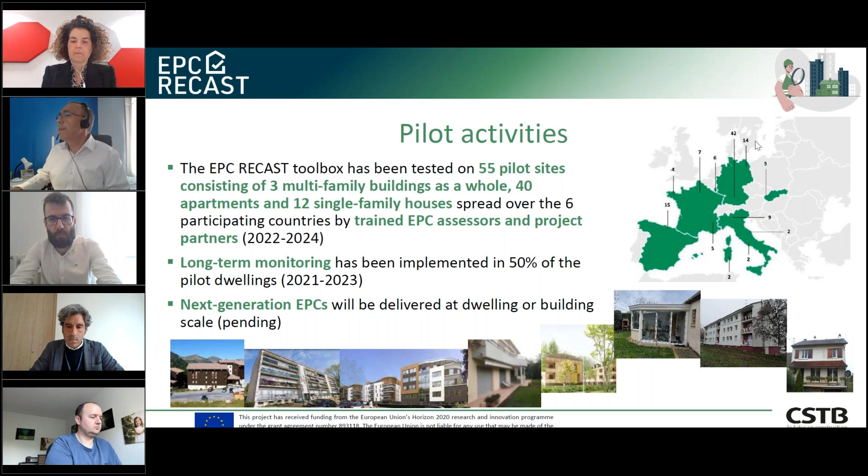Thank you, Dominique. I will introduce in more detail the technologies we have developed in the project and the overall integrated process that is at the heart of EPC RECAST. So I'm Olivier Grelou, I'm the coordinator of the EPC RECAST project, with more details now provided on our process.

Just to recall the 3 EPC RECAST steps, because I will present each technology in relation to each step, to say again what Dominique said: we have first the on-site data collection and inspection process. It's a very hands-on project, tailored to the needs of EPC assessors on-site. It's really focusing on the working practices of the assessors, so we are trying to provide technologies that improve each step in the working process.

Once again, the second step is the energy performance assessment, which is mainly the energy simulation of the building back at the office with dedicated software. And the third step, once again, is the certification process, where we provide the next generation EPC and an associated renovation roadmap.

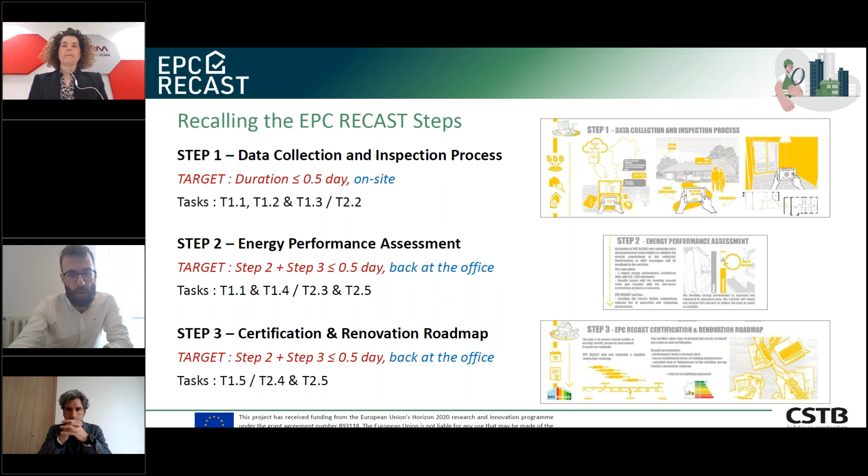Just to explain, if we look at the standard process for an EPC assessor, we can see that there are several main steps. The first one is to take care of the standard conditions of climate and use of the building. Generally, these conditions are automatically integrated into dedicated simulation software.

The input layer is where we collect data about the building fabrics and energy systems in the building. Each EPC assessor does it their own way. Practices are very variable inside a country and from one country to another, and there is no standard approach to collect information about the walls, windows, or energy systems. So it's a very fragmented process overall at EU scale.

We have the evaluation layer where we need to use standard national software. In several countries, there is just one single calculation method - that's the case in France, where you have different software interfaces related to the same computation core. In other countries, there is more software that can be used with different calculation approaches. But in the end, you need to use software that is nationally approved by the state to run the simulation and issue the EPC in that specific country. So that's the normal process.

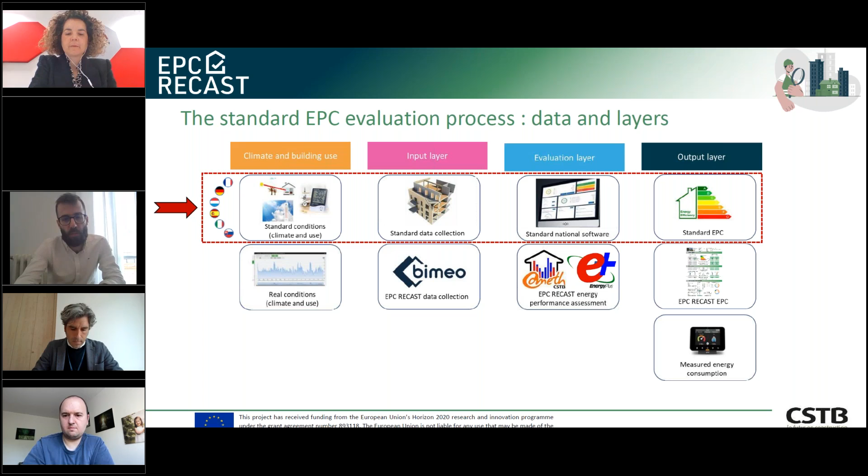What do we do in EPC RECAST? We do it in 2 steps - not on all pilots, but on the pilots where we have been able to test as many technologies as possible.

What we do first is collect real conditions of use of the building. So we have the real climate that is measured and monitored from weather stations and from sensors located on site. We have this dedicated data collection process mainly based on the Bimeo technology on iPad.

Then we have an energy performance assessment simulation that is done with dynamic energy simulation models. Mainly two models are used in the project: the COMETH one, developed for new buildings in France, and Energy Plus, which maybe some of you know.

What is interesting here is that we are using measured energy consumption to automatically calibrate this model, to reduce the gap between the energy simulation and the energy consumption of the building. This is why we use real conditions to adjust the model and have a calibrated model, so that in the last step we can issue the EPC.

Once the model has been calibrated with real conditions of use, we go back to the standard conditions that are mandatory to issue an EPC. So we use again standard weather files that do not correspond to the location of the building or to the real use during a given year, and standard conditions of use for the way the heating system is used.

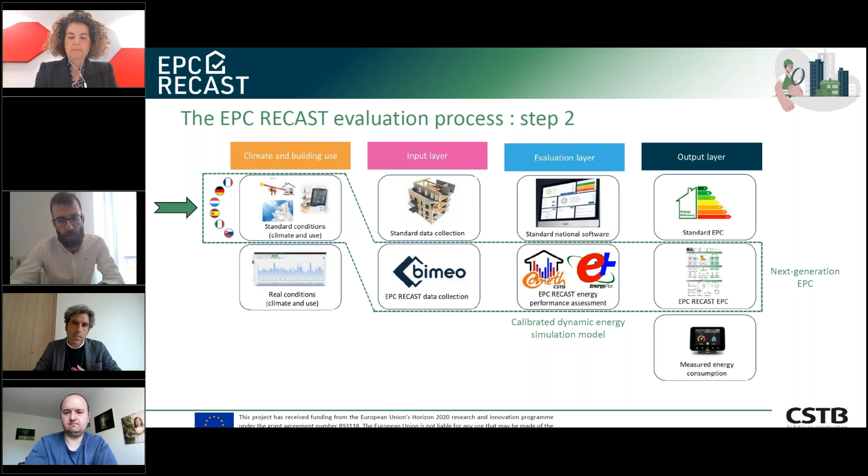To do that, we have developed an integrated digital approach based on what we call a common data environment, meaning we have standardized a data model of the building based on the XML format, a given format for a data file. This XML file is stored on an online cloud-based platform and is related, as you can see at the bottom of the screen, to different documents.

Since it's standardized, you can store in this central data model information coming from pictures, from plans, from previous EPCs, from a BIM model of the building, from energy bills, and this information is stored inside the EPC. We are not using all the functionalities that could be developed with such an integrated scheme, but we have implemented the approach.

And on top of that, we have services. We use different apps to collect information about the building, to do the post-processing and the evaluation when we do the simulation, and the delivery.

These different data files and services, which are digital apps, are all located on this platform called KROQI, based on French digital architecture, where we have a data file management system and different apps that you can launch as you would do on an iPhone, smartphone or tablet from this online service.

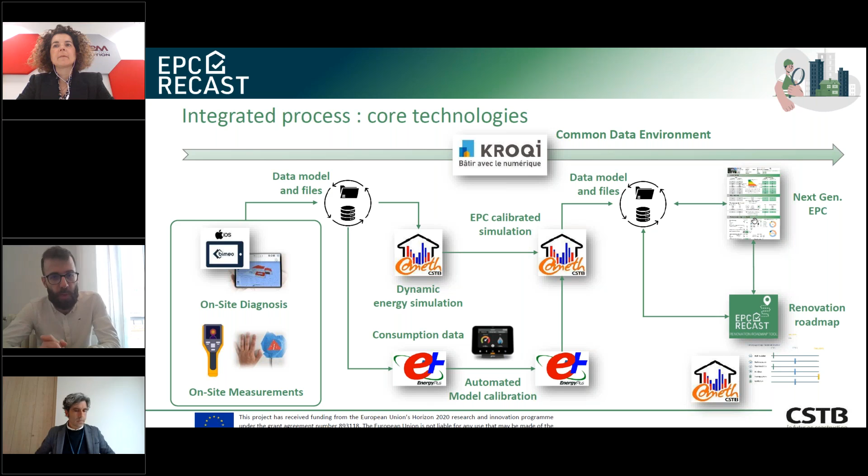So these files, the information we find in the different files in the EPC certificate and in the roadmap, correspond to each other. We have more details in the renovation roadmap, but this tool also helps better evaluate the building with the EPC.

If I zoom into the technologies, the core process really relies on new data collection. The difficulties EPC assessors face are that often the building dimensions are not accurately evaluated, which is a big problem because it impacts the kilowatt hours per square meter and the heat transferred through the walls.

We have high variability of data collection practices and results, and uncertainties in assessing the thermal characteristics of the building envelope. Our major contributions include specific measurements for on-site diagnosis, as well as questionnaires developed by R2M to assess the normal practices of EPC assessors in evaluating these building characteristics.

We have also tested infrared diagnosis by drone for multifamily buildings to evaluate the discrepancy of performance between different flats. It cannot be used today by EPC assessors, but that's a process that could be used in several years for the assessment of big buildings.

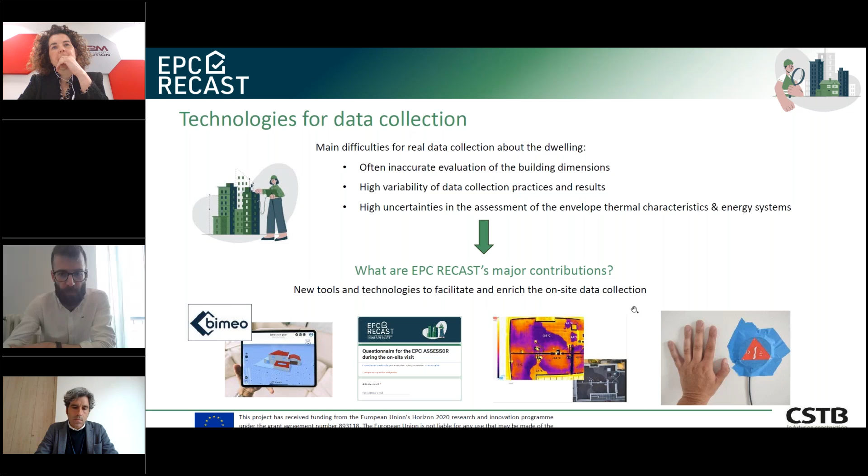I will not present all technologies, but just to give you more insight about the inspection tool developed by this SME company in France, Bimeo. You can see it being used here in this example with the iPad. The idea is to locate the different walls inside the building by visiting it quickly with the iPad.

Then it automatically generates a BIM model with accurate geometry and dimensions of the building. We have also associated questionnaires that help the assessor observe characteristics about the walls, windows, and energy systems. The observations themselves are not really an innovation, but the whole process is centralized in this iPad app, which helps streamline the process and lets you spend more time inside the building collecting information. This is really fast data collection.

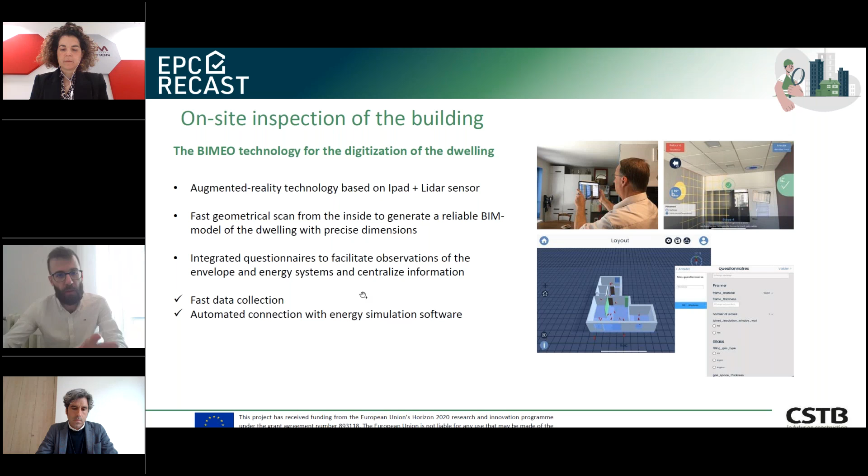This company is also developing an automated connection with energy simulation software. We have tested this link with research simulation tools in the project, but the company is also developing links with real software sold on the market, so you could have an integrated process combining data collection and simulation.

For the specific measurements, we focused on the thermal characteristics of the envelope because they have a big impact on the simulation results. Generally we lack technical documentation dating back to construction to know exactly what materials and products are inside the wall. Visual observations are insufficient to characterize the composition of the walls and thermal bridges, and it's not possible to take samples of wall materials to evaluate them.

So in some countries, the assessor uses default values. For instance, if the building dates back to 1970, a U value of the wall is automatically evaluated based on that, which is generally wrong and leads to higher consumption values in the simulation. Or reference values can be based on typical walls and materials, but once again the accuracy does not exactly correspond to the real thermal characteristics of the building.

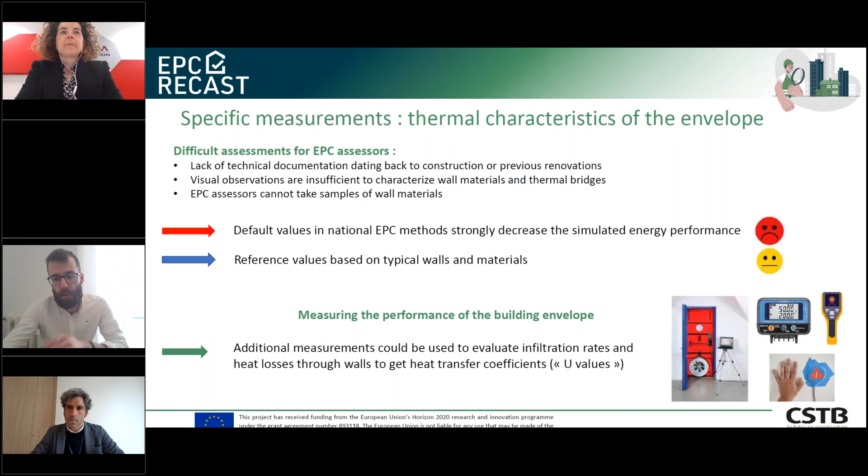So we measure the performance of the building envelope with infiltration rates and heat losses through dedicated equipment, which we'll see in the next slide. It's based on heat flux meters installed on parts of the wall. First, a thermal camera positions the heat flux meter at the right place, since a given wall could have heterogeneous conditions, so it helps position them correctly.

They must stay installed for 7 days, but since the sensor footprint is small, it doesn't have a big impact on the households. So you could install them at a low price, leave them for a week, and come back for the results. They're also associated with sensors to measure indoor and outdoor temperatures, and the measurement must be done when the difference between inside and outside is greater than 10 degrees, so in winter when the weather is cold outside.

This can also be done to evaluate wall performance of a multi-family building with sampling. You can see in the picture that only some flats in these examples have been monitored with these sensors. Then, using calculation principles, we get back to the total heat transfer coefficient of the whole building. The cost is limited, and we think this could also be used in the future in some audit or EPC assessment processes.

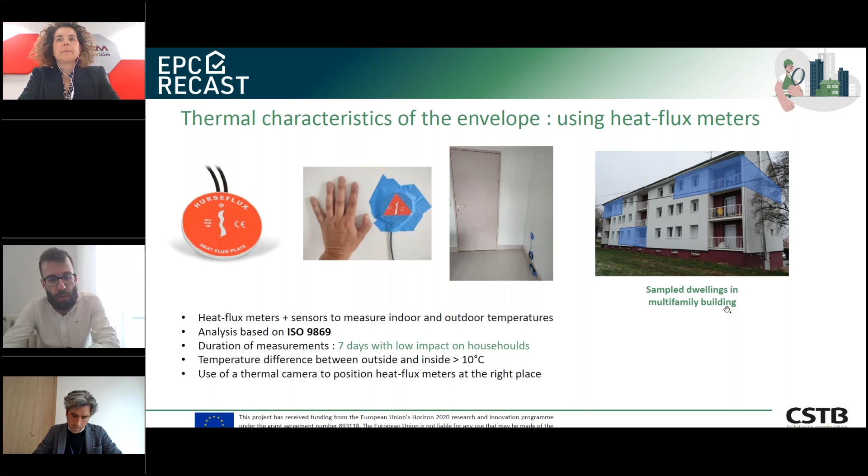Now, if I go to the energy performance assessment, to provide more details about the process, we have on-site data collection with the BIMEO app, cloud data storage, and you can output an IFC file of the building geometry, and a CSV file that you can fine-tune on the computer if you do not agree as an assessor with the evaluated values. This information is then transferred to our standardized EPC data model, where we have all the information about the building. We developed a web-based simulation interface for our test.

What's interesting is that we implemented data conversion algorithms, because we have only a restricted set of information about the building from the on-site data collection. But for the dynamic energy simulation, we need more detailed information, since these tools are more detailed. So we enrich the collected information with default assumptions or dedicated algorithms to be able to run this dynamic simulation.

The principle is that we do not ask an EPC assessor to collect more information than they do today. We convert this information with the algorithm, so that we can then run a more detailed simulation engine, one normally used by other professionals doing energy consulting and large simulations of bigger buildings with more detail.

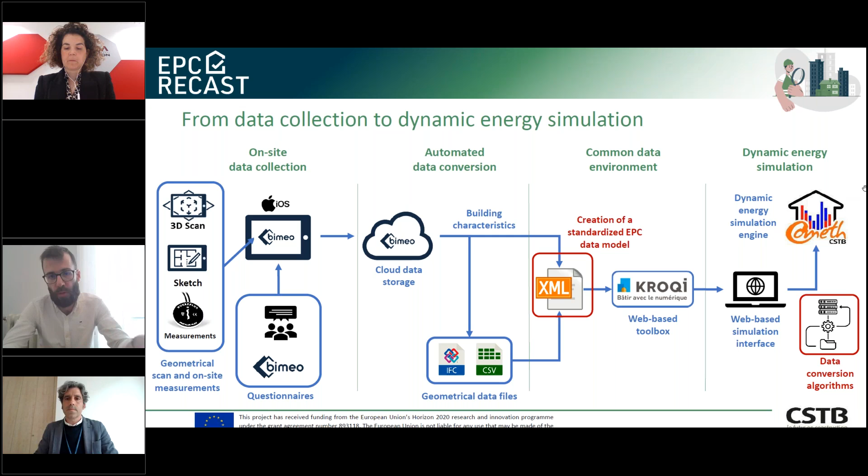If I zoom in on the calibration of parameters, it's a toolbox implemented online. The principle is to reduce the gap between the energy simulation results and the measurements. At the bottom you can see values before calibration for the U value of the walls, if you haven't applied the previous method, the infiltration rate, or the solar characteristics of the windows. The algorithms are run, and we get values after calibration, which are normally closer to the reality of the building.

So it's still an R&D tool. We're not certain it will be used today by EPC assessors in the field, but since it can be simplified with a dedicated online interface, maybe it's something that could be used in several years by professionals.

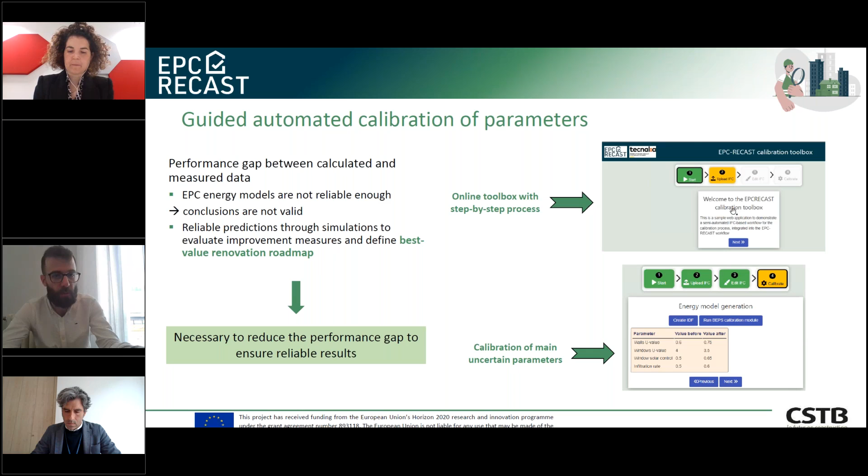And in the end, about the certificates, we developed this next generation EPC template. We have two parts: the gray part is before renovation, and the green one on the right side is after renovation, which could be based on dedicated simulations or a renovation roadmap.

We have energy rating and CO2 emission. The scales correspond also to the revision of the EPBD. So the A rating corresponds to the ZEB level, and the lowest rating to the minimum energy performance standard that will be imposed by the revised EPBD.

We have a thermal comfort score to analyze the thermal comfort of occupants in the building in winter, mid-season, and summertime. We have more details at the bottom about energy costs and consumption per energy use - heating, domestic hot water, lighting, etc. - but also per type of energy, gas, electricity, etc.

Then on the second page about the building envelope, we provide before and after renovation characteristics of the walls, of the infiltration rate, of the energy system, so that we have more details.

We have measured energy consumption too. If you have smart meters installed in the building, or long-term monitoring, you could draw these graphs recapping in a simplified way the domestic hot water and heating consumption of the building, standardizing it according to the local weather, so that on the EPC you could find a comparison between the measurements of energy consumption and the simulation rating.

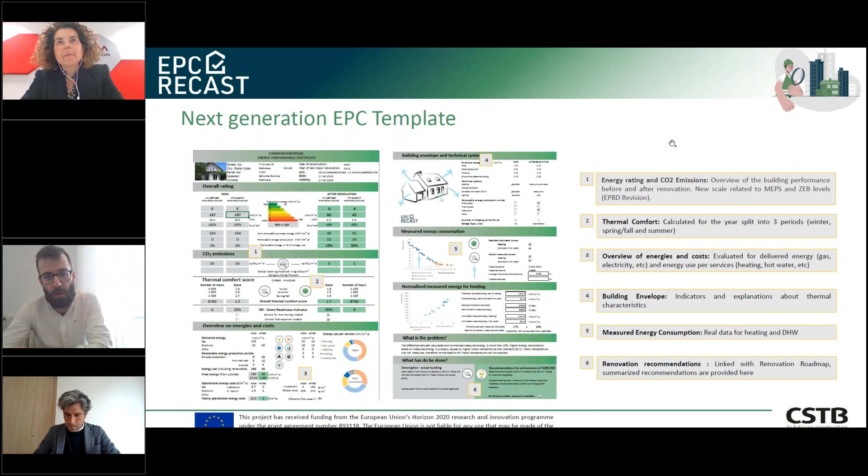So this is a test about the link between these two tools, which are becoming major tools in the EPBD revision.

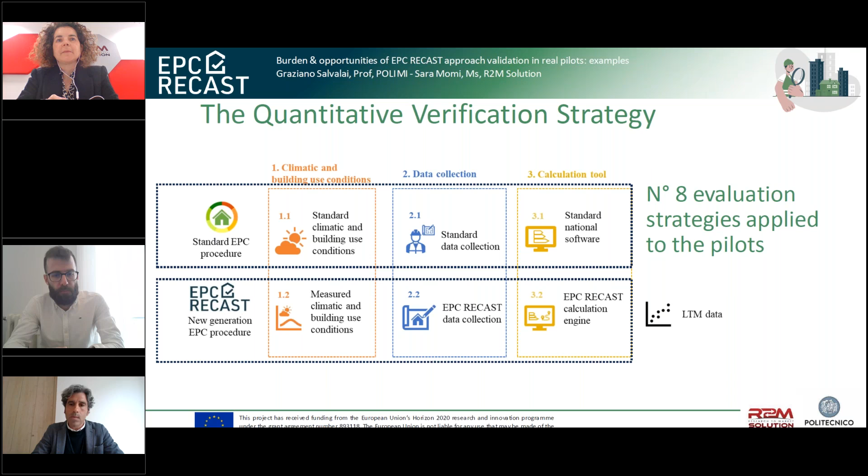We developed together with the coordinator 8 evaluation strategies applied to all the pilots, and then we use the long-term monitoring to compare the results we had from the simulation with the real long-term monitoring data.

And then very fast on the different strategies, I'm not going through all of them, but the idea is to use long-term monitoring on one hand to analyze our approach. So the EPC RECAST approach uses real conditions, using the bimeo app, the LiDAR-based technology already discussed and introduced by my colleague.

And then the EPC RECAST energy assessment tool based on Comet and EnergyPlus, as you have heard before, and then even populating the EPC RECAST with the different information we think is very important for the certifier, but also for the final user.

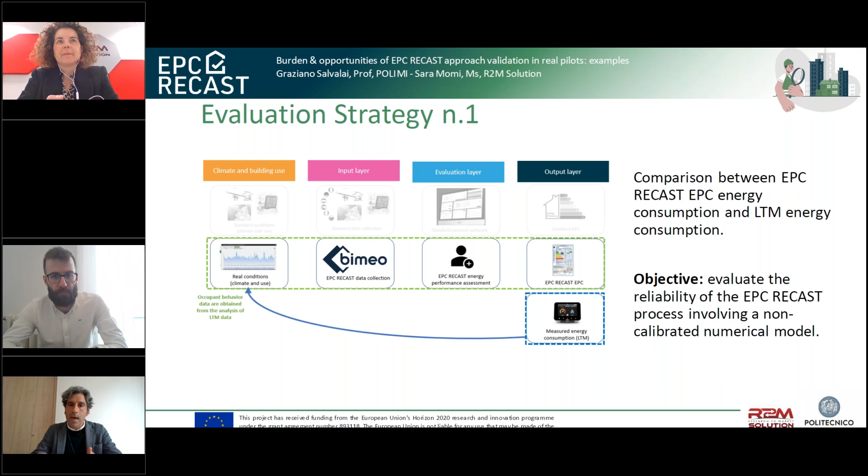Then we use the real measured data for checking. And then we have other different evaluation strategies, but we use some of them to check a specific piece of our tool.

In this case, for instance, we want to test our methodology of geometrical data collection against the standard one. So we engage the assessor, and we share our geometrical survey with them, and they share their geometrical numerical data with us, and we try to make simulations with different inputs in order to see how this can impact, or how in a way we can be more precise than the real standard.

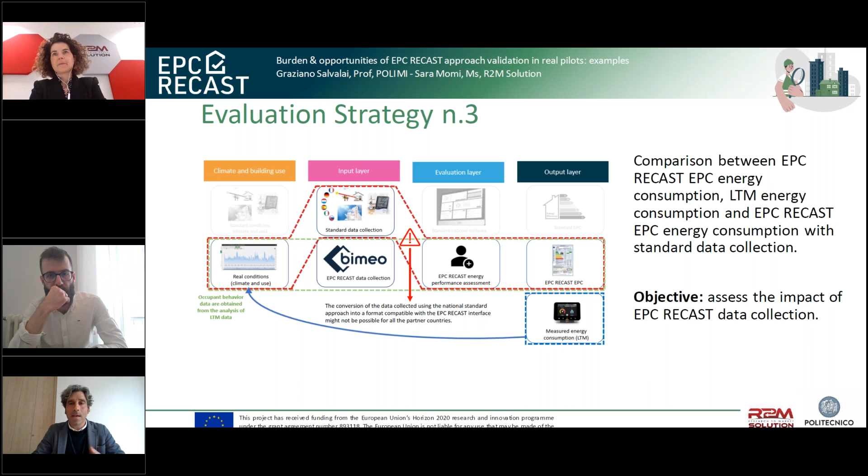We experienced this in some buildings where the drawings are not available at all. We're talking about buildings that might be built in the 70s or even in the 50s. It's not easy to have the drawings, so the geometrical survey by the standard assessor is made by hand, and somehow they can lose some information.

So this evaluation approach has been done in a lot of demo cases across Europe according to our goal of the project. We have 48 demonstrators with long-term monitoring across Europe.

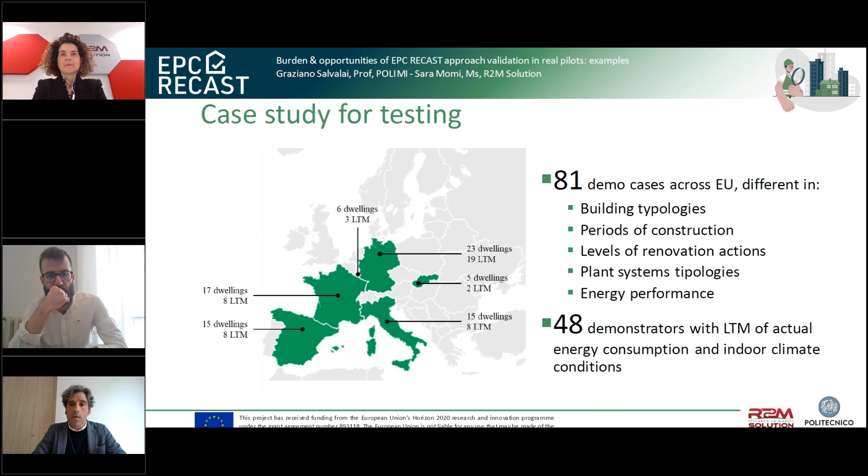And then I'm focusing today a bit more on Italian pilots, since we work on our buildings here distributed all over Italy. We have 81 demos that have been involved in the project, different in building typology, time of construction, level of renovation, plant system typology and energy performance. Of course, the idea was to have a collection of buildings as different as possible across Europe in order to check the pros and cons of the approach and so on.

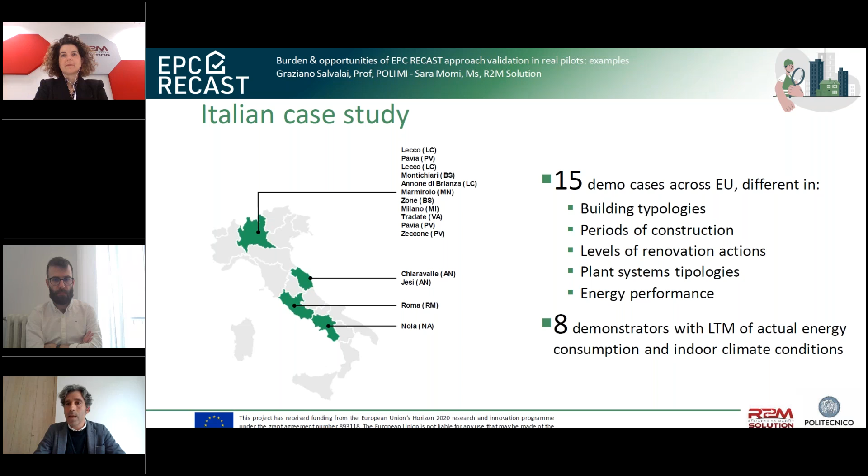Among 15 demonstrators, we had 8 with long-term monitoring. We have data from more than 1 year, collecting winter and summer season. The idea was to analyze and use this data for even collecting the EPC RECAST template with the measured data.

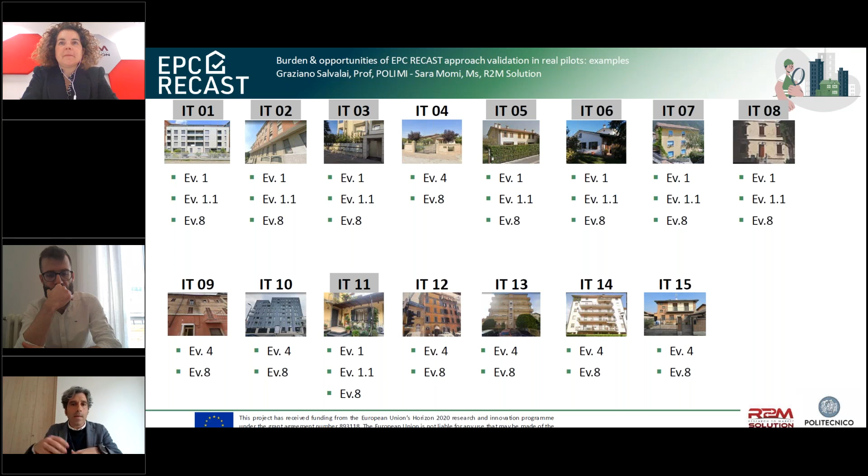Here's a short recap of our buildings. This is for the different evaluation strategies in the different pilots. We used the pilot as a demonstrator of the different points of the whole process. The idea was to use some of the pilots to test the data collection, another perhaps for testing the long-term monitoring, and another for testing the engine, the calculation tool, respect to the standard.

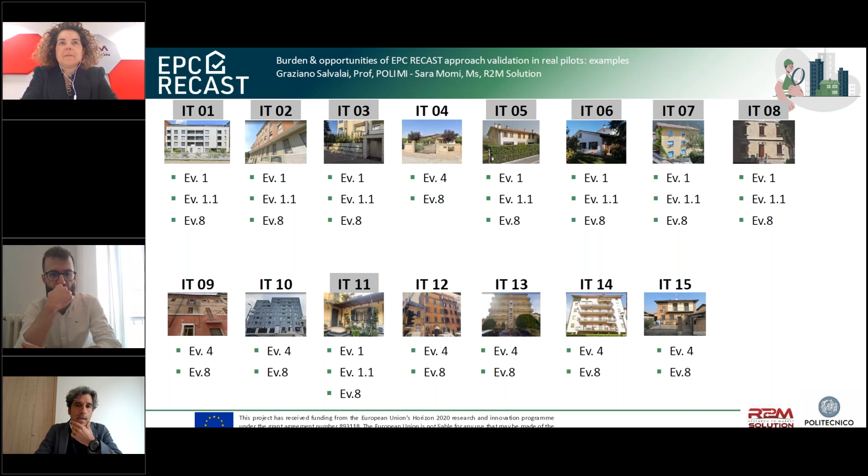So we mixed a bit the different evaluation strategies, but the idea was at the end to prove the overall concept. The long-term monitoring has been applied in half of the pilots, and at the beginning of the project we thought of a specific methodology in order to balance the effort, the cost, and the practicability.

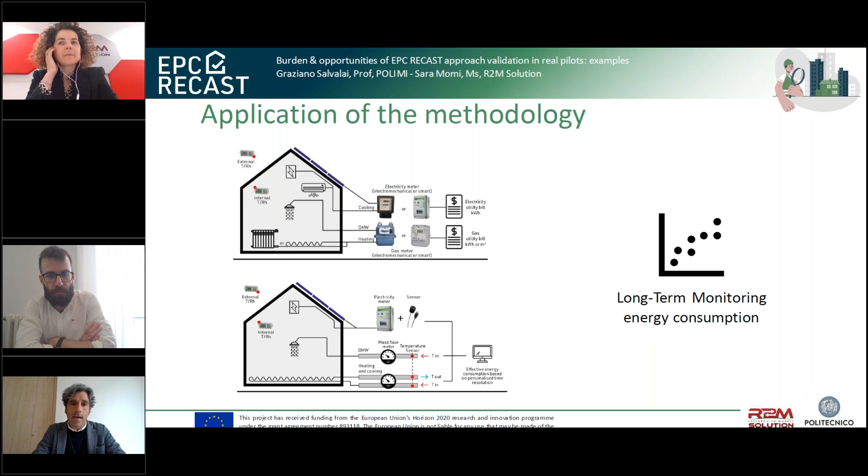Our idea was to be as less disruptive as possible, so the idea is to use plug-and-play soft tools for collecting energy. In some pilots we decided to apply some technology; in others we used the bills for analyzing the data needs for heating, cooling, domestic hot water, and even electricity.

In some pilots, according to the overall project picture, we developed, with the coordinator and the effort of all the partners, a sort of low cost and plug-and-play monitoring data tool for collecting climate data, because the climate data should normalize first the real data, and then the climate for simulation was very important for us in terms of comparing the different results from the standard EPC and the real one, and then the thermal energy and the electrical energy.

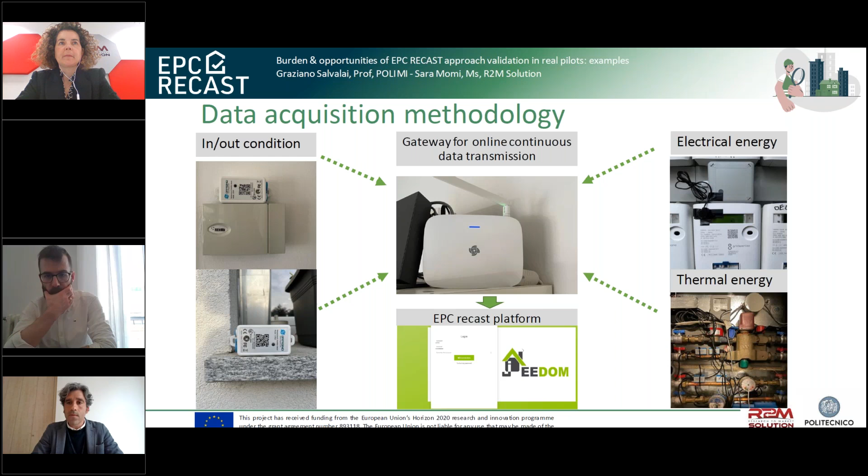We also decided to collect electrical energy to see the impact of these energy vectors in some buildings respect to others, in order to understand if we may have some contribution from our project in defining new indicators.

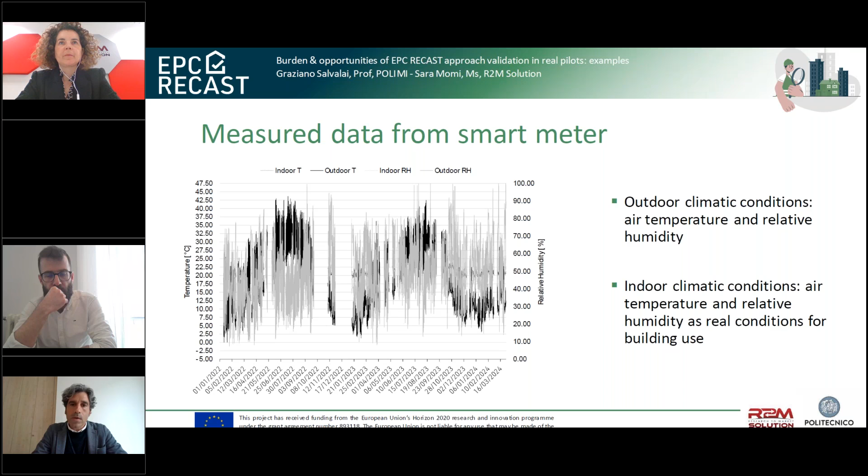Here are some examples - I don't want to go into detail, but the measured data was based on hourly basis, so indoor and outdoor conditions. That was the main core of the monitoring, again having the climate data representation, and then the heating, cooling, domestic hot water measured over the year.

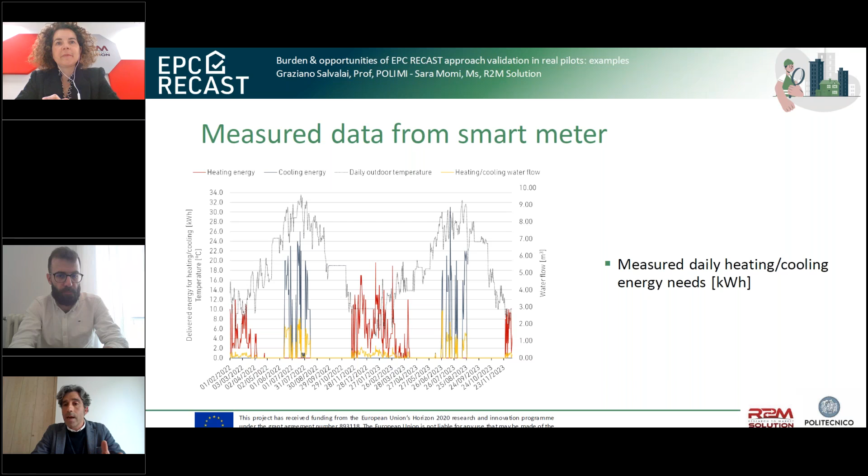We have more than 1 year in some pilots, in others 1 year, but the idea was to really collect the real data, the real energy consumption, as a reference for our simulation results. Of course, we also need to aggregate the data.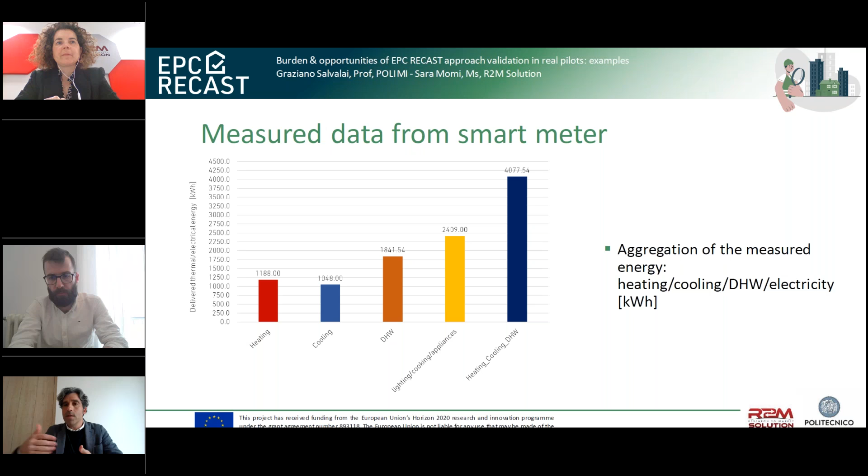We had really a lot of data, and this was very helpful for the project. But we also had to aggregate it in order to compare at the end of the whole process, since we need to prove that what is written in the certificate - aggregate data in terms of primary energy for heating, cooling, domestic hot water - matches our collected energy consumption.

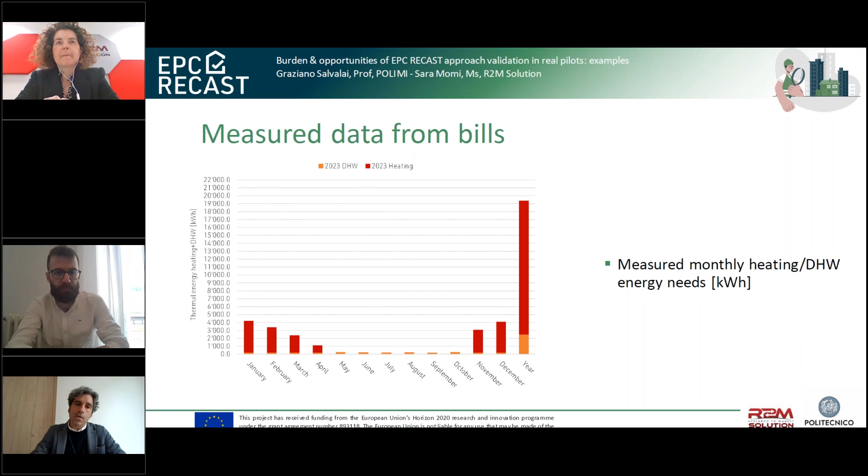In some cases where we worked with the bills, disaggregation of data was not possible, so we took the heating from the bills and split the domestic hot water according to a baseline of energy consumption of water during the summer season. But even in this case, we tried to come up with the overall energy consumption, trying to be very close to the real energy consumption.

And this was related to the long-term monitoring. Then we started with the on-site data collection - that was one of the core and main aspects of the project.

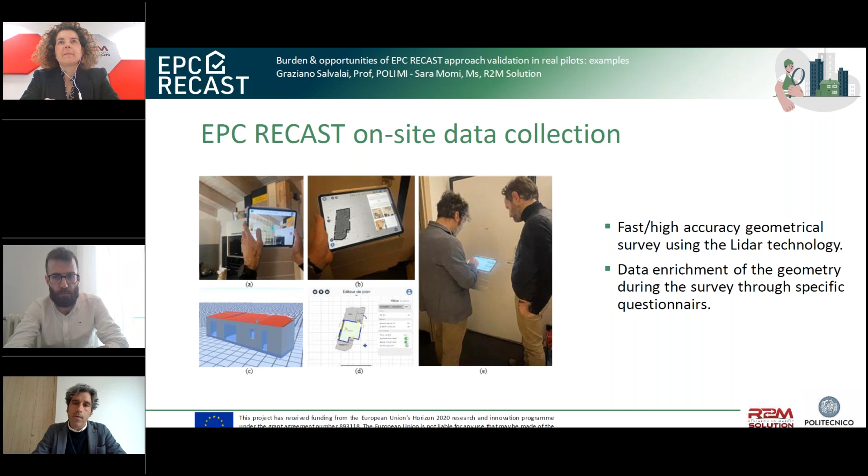In this case, we used this phase of data inspection for training the EPC assessor. So in the overall picture, we hired assessors in all the pilots in order to prove that what we do as EPC RECAST assessors is similar to what the standard EPC assessor does in a building.

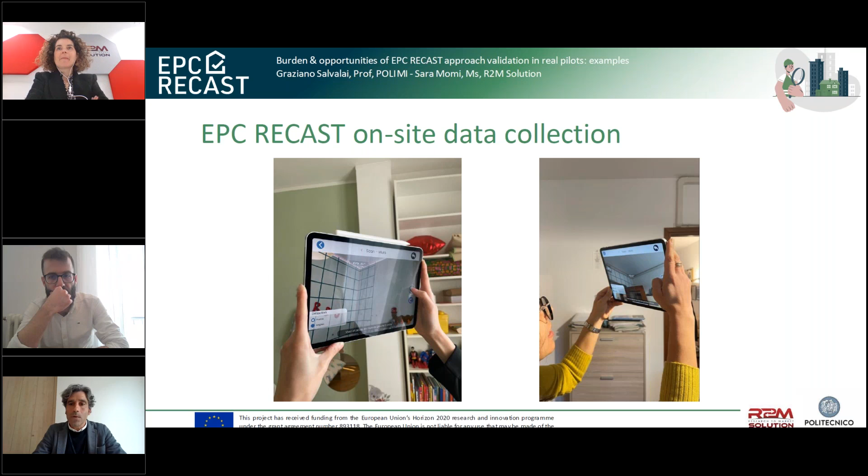We even trained them to see their point of view and analyze if perhaps they would use similar technology. But this will be discussed by my colleague Sara Momi in a few slides.

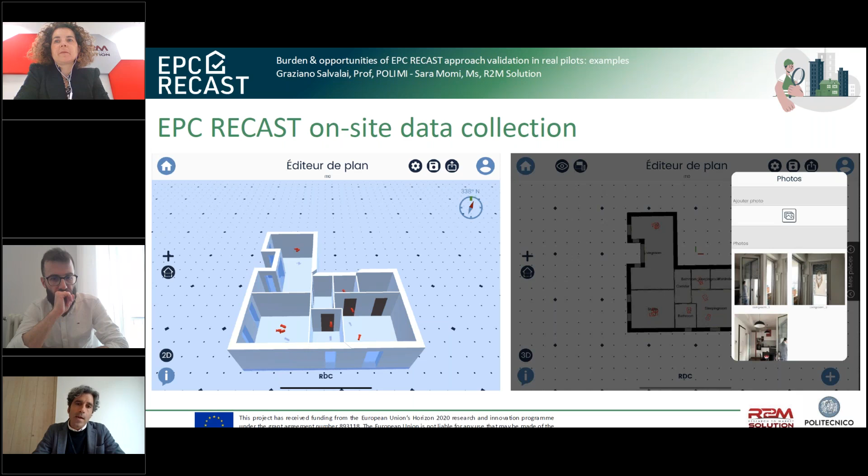And here you see some pictures. I won't go into detail, but what we saw here is one of the outputs from the assessor's point of view. It's easy to collect the information, and there is no information missing using this tool. So we have pictures and information all together, and this respects our expectation of a half day data survey, which was proved by our pilot activity.

Here's some screens on the data enrichment. It was not only a question of collecting information, but even the geometric information, even the performance of the wall and windows. So it was a very easy flux of information.

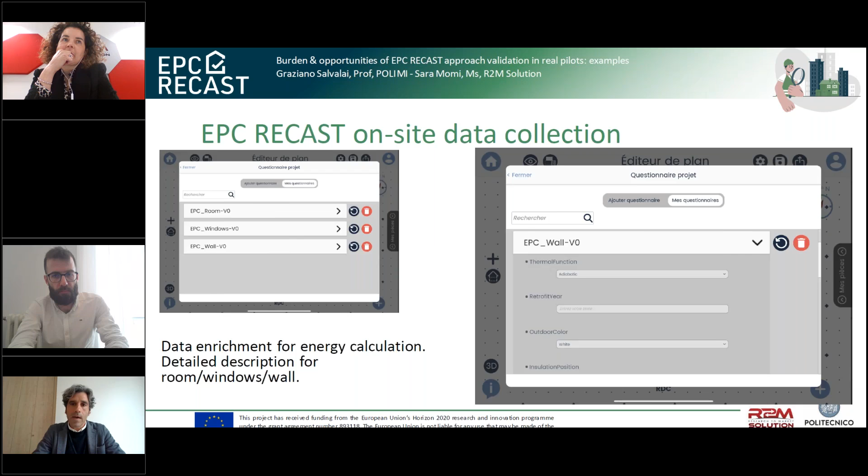At the same time, I was scanning the geometry. I was inputting, according to the available information, the typology of wall, windows, the year of renovation, whatever information we found fundamental for our project.

And then, according to the overall picture of the data flow information shown by my colleague Olivier, we tested the automatic generation of XML. According to the scan and the data enrichment, we move to the XML that is the input to our engine. This was created very fast by the EPC RECAST tools, leading to the creation of the EPC RECAST EPC. Here we have some results of the monitoring in this case.

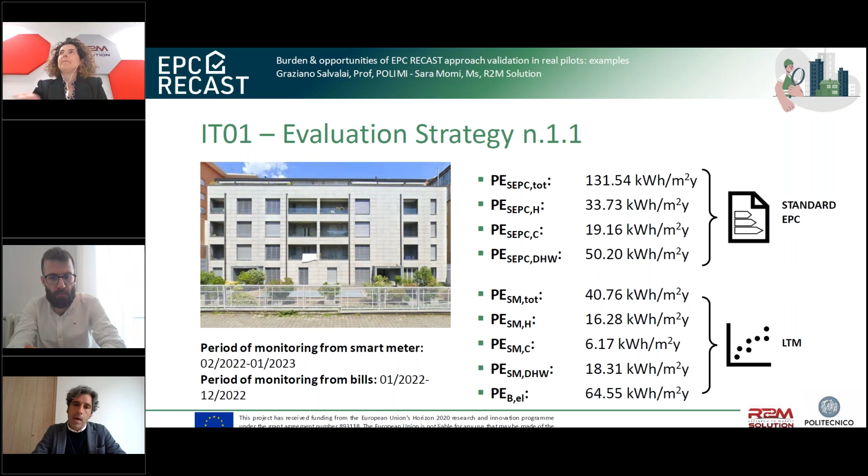The monitoring up to now is looking at the difference between the monitoring and the EPC RECAST standard EPC. We found some discrepancies, but this is also due to the use of the building. At the top you see the standard EPC calculation for total heating, cooling, and domestic hot water, and in the lower part you see the long-term monitoring.

If we analyze the energy consumption here, we saw that what we found from the monitoring was much lower than expected from the EPC assessor. What we can say immediately is that the use of the building has a very high impact. We know who the user was here—they were very aware about how to use the building and how to save energy. This is why we had this kind of discrepancy.

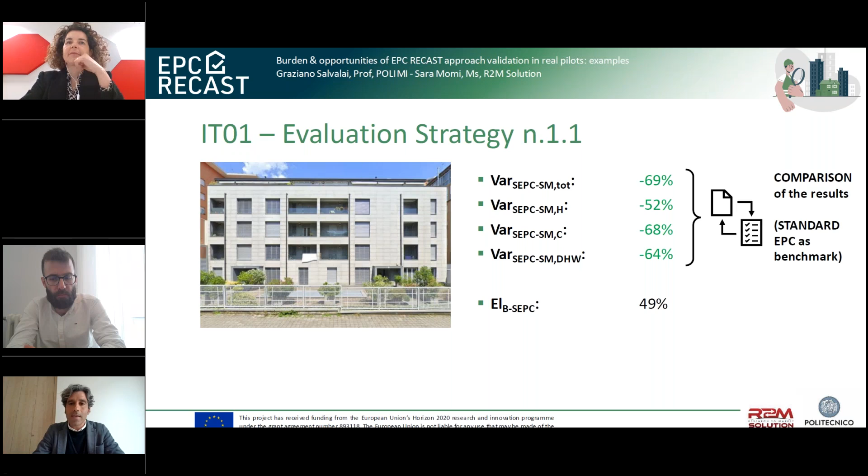What is also interesting here is the electrical energy consumption, covering 49% of the overall energy consumption. This building is fully electrical, so in some cases monitoring and calculating the electrical energy is very fundamental in a building.

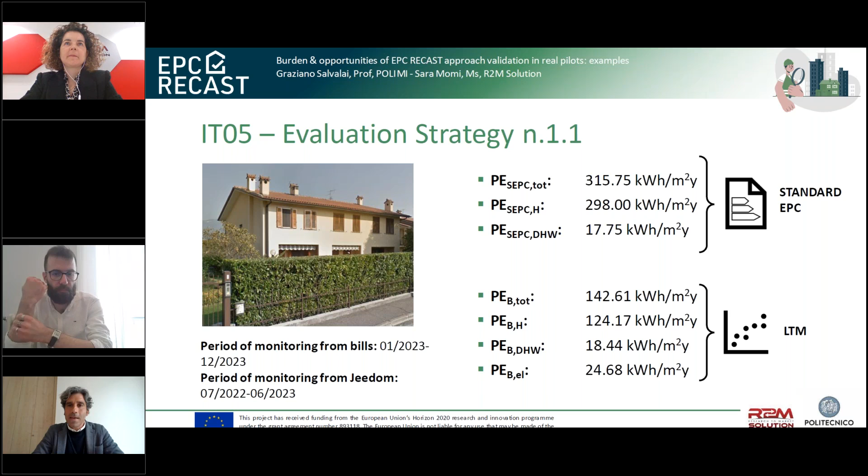This is another case, a building built in 1960, where we also had a discrepancy. But the discrepancy is due to the fact that in some buildings not the overall building is warmed up, because there are some rooms that are not normally heated.

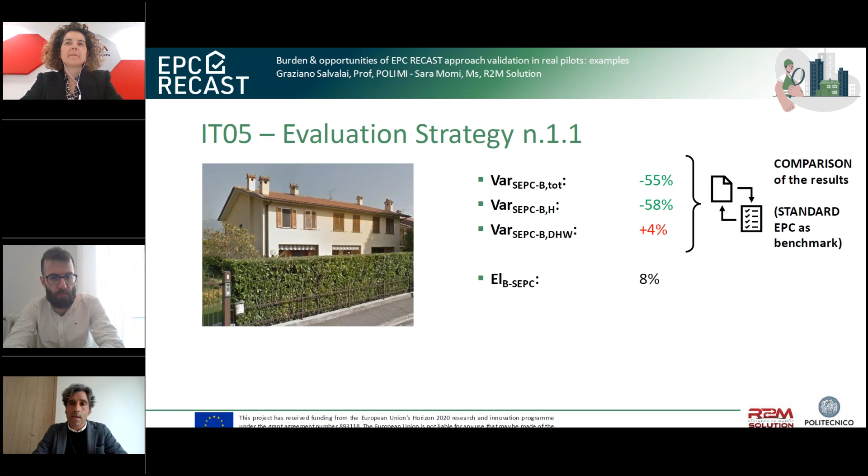So what we saw from the monitoring is that in some cases it's far from the real energy consumption. In this case, the domestic hot water, to be honest, was higher—what was measured was higher than what was expected. But these are some examples regarding how we are using the long-term monitoring.

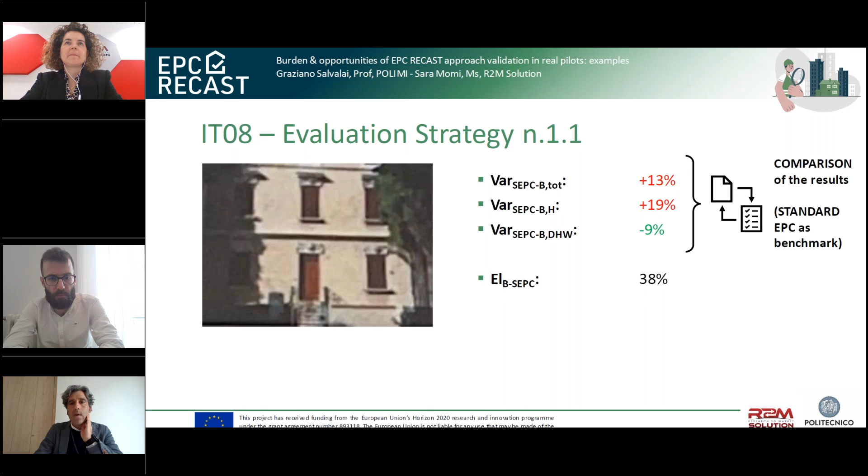What is missing here currently is comparing the results from the EPC RECAST EPC, because we are still running simulations. In the next weeks we will also have the third comparison: the standard EPC, the EPC RECAST EPC, and the monitoring, in order to have the whole picture of the process.

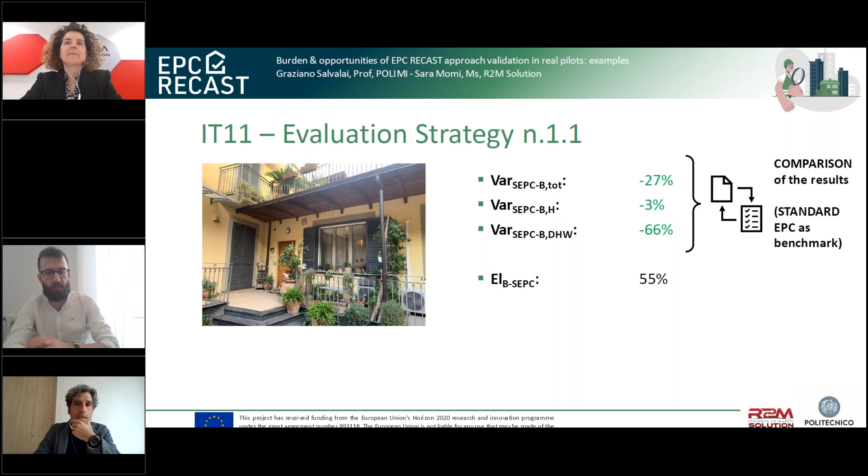Here, again, we have this discrepancy in these buildings. So we are collecting energy consumption data along the pilots and seeing what the difference is. We also try to use this long-term monitoring to tune the simulation.

So I want to conclude by saying that we developed an interesting testing method for quantitative assessment, and the long-term monitoring defined was affordable in terms of cost and installation, because the idea was to be really plug and play. When working in a real building, it's very hard, because we need to understand the needs of the users. The long-term monitoring is reliable for some of the parameters. In some cases we found difficulty getting detailed information, but the overall picture is very interesting.

The idea is to always implement this kind of data monitoring in all buildings in order to see the energy consumption.

Then, rapidity and accuracy of the geometrical data collection, that's very fast and very reliable in terms of geometry. Of course, some training is needed in order to increase the velocity and the data quality.

Then the fast geometrical data enrichment. Once we have the geometry, adding data to it is very easy and fast. That was also proven by the test with the standard EPC assessor.

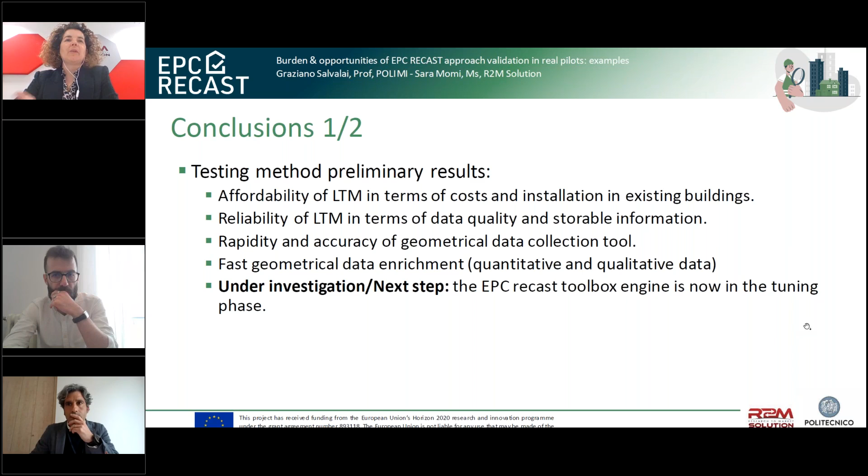Just some quick slides on the qualitative assessment. Together with the quantitative part, the project is very much focused on delivering a qualitative assessment, meaning understanding the approach we are using and how much it is aligned with the expectations of both experts and non-experts. By experts we mean the assessors, the energy performance assessors of buildings, and also building asset managers. On the other side, we have the owners and tenants, who might not be so expert in energy performance certificates, and especially in the digital tools we are using in this project.

For these reasons, we wanted to target a number of questions for each of the two audiences, and also improve these questionnaires and the conversation during the pilot validation, thanks to some pre-testing of the process done in exemplary pilots. This pretest happened in Italy and in Spain, and it helped us make the needed adjustments to really understand, from the qualitative point of view, the direction we are going.

The questionnaires were given in English, but there was also the possibility, thanks to all the partners we have, to translate them into national languages. We used Google Forms, and they were split in two. The first part was submitted during the on-site visits, so basically the assessor, together with the tenants and the pilot responsible partner of the project, were all together, and it was possible to have this lively conversation among all the people.

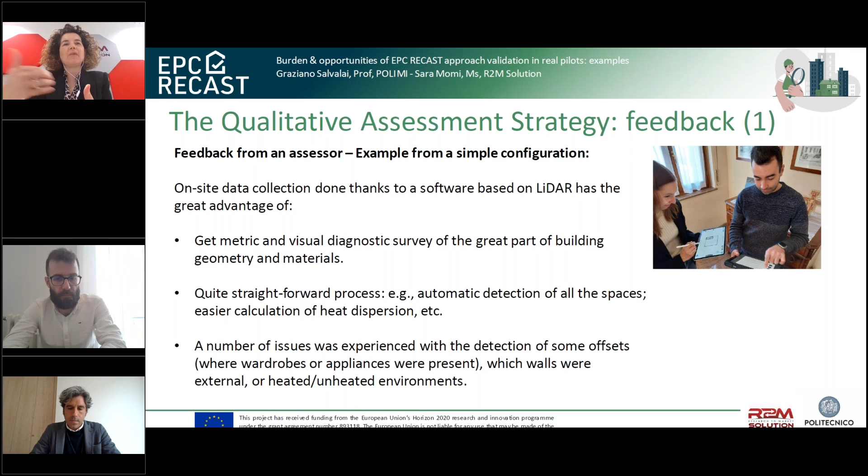At the same time, we are very clear, because today we're also talking about burden. So it's very clear for the consultant that this is a process that has to be improved in certain phases—there are still some issues pending, but we're working on it together with our partners. This is very clear, and it also helps us have a quite straightforward process in place.

On the other side, another assessor told us that this really facilitated data collection a lot. It reduced the time for preparing the visit. But what was most important for us was that using these tools attracted a lot of curiosity and attention from the owners and tenants.

So this was one of the basic focuses of this project: involving tenants and owners in the process, so that you can establish a long-term conversation in the future, making them real players for having the renovation roadmaps based on the energy performance certificates according to EPC RECAST.

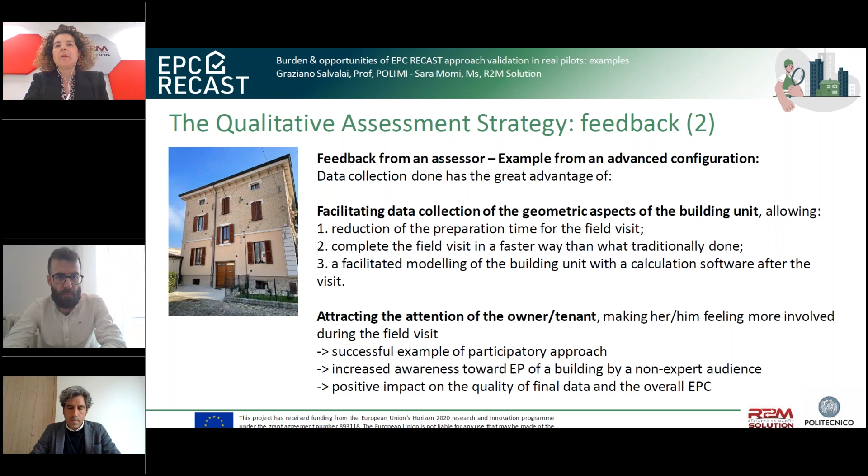This has also increased awareness towards energy uses in buildings in general. It's very much aligned with the European Commission targets towards sustainable buildings and mitigating CO2 emissions. Our conclusion, together with Polimi's SDB teams and all partners, is that there is an overall high interest and acceptance of the methodology by the assessors involved in all the pilots.

Owners are curious and interested in further applications. We are also delivering an energy performance certificate template which is correct, but at the same time easy to understand and more user-friendly for everybody, for citizens having a building.

The next step is really closing the loop between the tenant's need for building renovation and having the energy performance certificate according to EPC RECAST as a reliable basis for financial institutions, banks, etc., for granting money to the tenants and making available this renovation roadmap. Otherwise, we cannot involve in this.

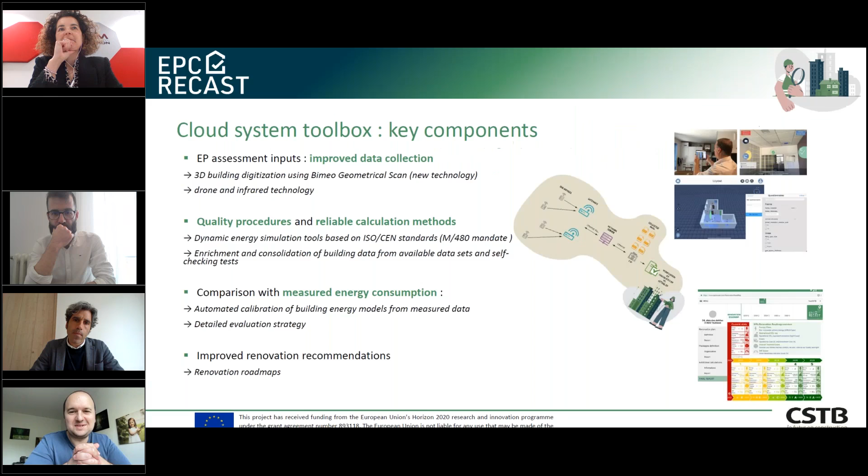So this should have been the overview to start with, the context in which EPC RECAST has implemented its activities, because it's very close now to the exploitation phase. It will end in a few months. So happy if all stakeholders and member states will take note of everything that EPC RECAST colleagues have been able to accomplish. It has been a challenging road, but the results are quite impressive.

So this is the context that EPC RECAST finds itself in. I'm not sure if I have been passed controls. Let's see. Yes, so I think that's me moving. Yes, okay. So I'm wearing multiple hats.

Today I'm wearing both the EPB Center hat and REHVA hat, where I've been working now for quite a few years. You can find me on LinkedIn, so those of you that don't know me yet, let's connect and exchange and sync. So EPBD RECAST, this is the process we have been undergoing in the last years.

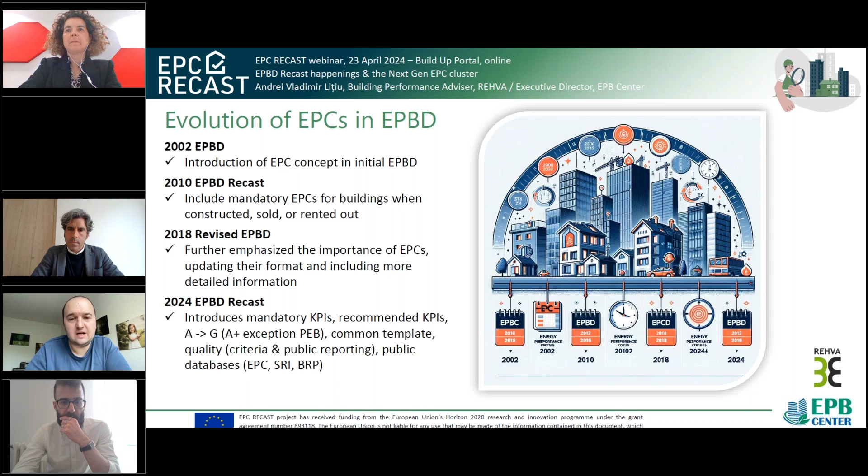There's a short list of key aspects that will bring EPCs to a new dimension. There will be mandatory and recommended key performance indicators, classes from A to G, with the only exception being A+ for positive energy buildings. There will be a common template at EU level. Quality will receive much more attention to ensure the same level of ambition in all member states, and there will be an introduction of public databases. In countries that are very keen on keeping data privacy as tight as possible, this I think is a big development. But for policymaking and actually supporting the energy transition, public databases are a prerequisite, at least in my opinion. I don't want to speak from anybody else's perspective.

This evolution, for me, I find outstanding and commendable, because building performance—and I guess we are finally there—needs to be acknowledged as a complex and ongoing process. It's not something you simplify for the sake of keeping administrative processes simple, because what do you get then as an outcome? And it's not something you do once and then forget about it. With the current EPBD, this is exactly acknowledged: buildings at assessment level—design, installation, commissioning, certification—and then the lifetime of the building, the operational and management part, are now all covered. EPC RECAST has done quite a lot on this, and it's important that this is happening and acknowledged, because otherwise EPCs and all the other policy instruments would just be looked at as administrative burdens, whereas there is technology, both hardware and software, that can support this complex process, which is building performance.

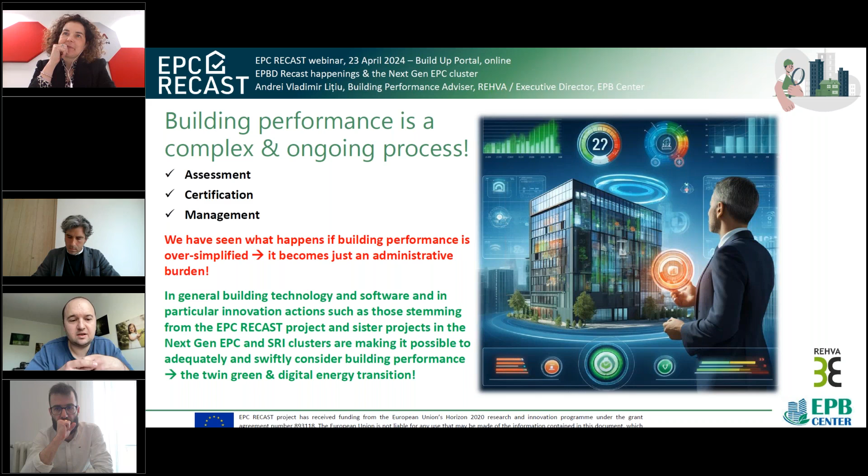And when I say building performance, I mean all facets, not only energy, emissions, indoor environmental quality, and so on. EPC RECAST, and of course the other sister projects, has been doing and will continue doing just this. So to support that this process is implemented as it needs to be, no oversimplification, just leveraging technology, both hardware and software, in innovative ways to make the whole process faster, more effective, more qualitative, as my colleagues already demonstrated. So I will end to say that we are now in a much better position, as EPC RECAST and the sister projects are already entering the exploitation phase in supporting the twin green and digital energy transition in the building sector.